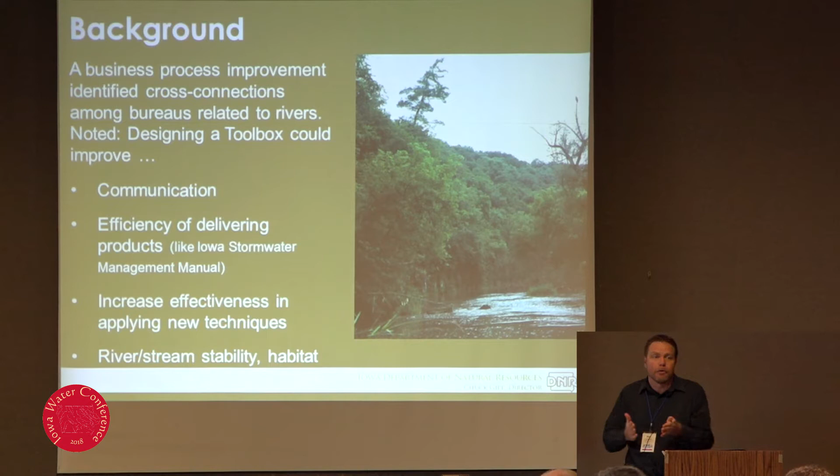And what does conservative even mean when you're working in a stream? And then finally, I think all of our final outcome goal would be that there's more river stability, which surprisingly equates with better habitat in almost all cases. Because there used to be this thing some smart aleck put up on our refrigerator at our break room at DNR, and it said, 'Fish need water, feds say.' It was a newspaper clipping. As it turns out, as these channels are getting blown out and wide because of excessive energy and such, well, just having the depth for fish in a narrower, tighter channel can be a major improvement in habitat.

So what did we do? We started this thing called the River Restoration Toolbox effort, and it was and still is a collaboration. DNR has the environmental services side, and I'm more on the conservation recreation side. We co-managed this project with Tim Hall. He was the leader for it on the environmental services side, but I was the lead technical advisor for this project.

We brought in a lot of folks to help us on an advisory committee to review all the practices, the methodology of the assessment method. We really thought that in the stream restoration world, there's some raging debates about my method's better than your method, blah, blah, blah. In Iowa, we decided real quick, we don't have room for that. We don't have time for it. Let's talk about practices that'll work here, and let's talk about the baseline assessment that's really needed here.

Go out and try it and adapt it when it doesn't work. If we have problems with it, we're going to change it in the next year or two. So we developed some consensus on...

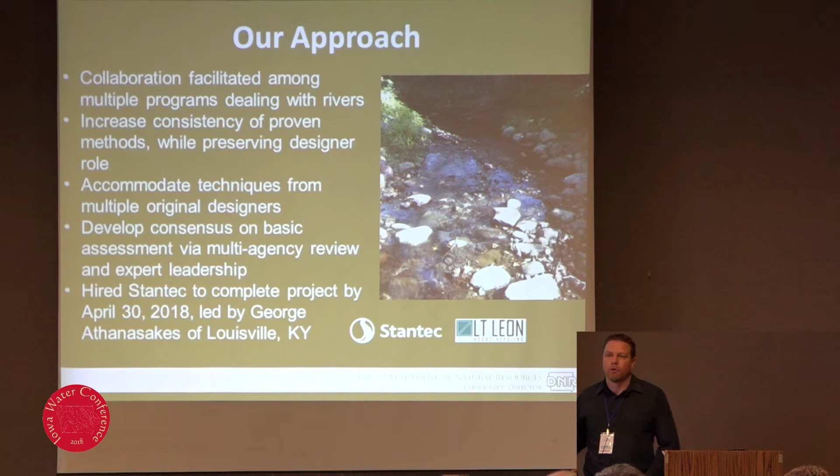That ultimately hired Stantec to lead this project for us and to design a river restoration toolbox, including anything from the data you should really be collecting through design recommendations, and then detailed practices, and I'll show you what all that looks like. George Athanasakes was the lead for this project, and he's got dozens of large-scale river restoration projects under his belt. He leads the restoration group out of the Louisville office for Stantec, and it's been really great to work with.

So our advisors included anything from academia to various staff from different entities around the state, and we wanted to make sure it had some real world eyes on it, and then also some theoretical eyes on it, just making sure that we're broad based enough.

And then we brought in guinea pigs, paying guinea pigs last fall. In collaboration with ISWEP and Iowa Rivers Revival, we tested a first version of this toolbox on a group on the assessment side of it that came into Des Moines and surveyed a creek. Within a day we're entering the data, and then by the next morning had some answers, and that really helped us get some real-world ideas about both how to do the training and what some of the deficiencies were that needed to be addressed.

So this whole thing is really looking at what natural rivers would do left to their own devices, and how can you either tweak your river into getting closer to that scenario, or start over again wholesale because it's that far gone. And how do you make the decision about whether it is that far gone or not?

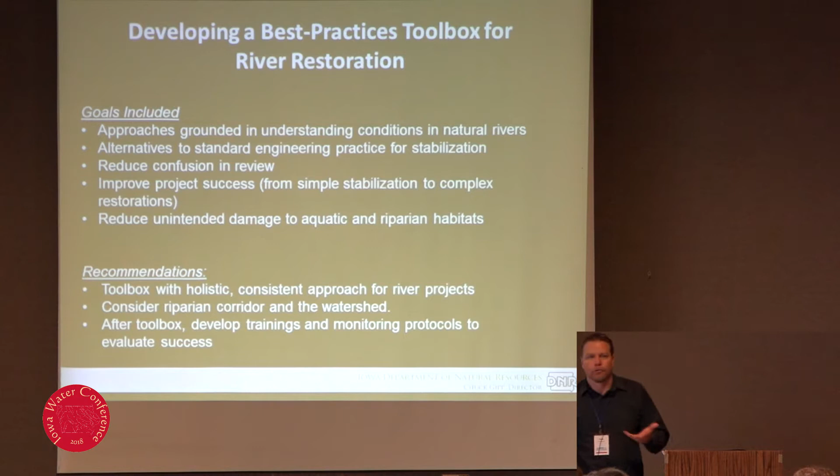The recommendations are holistic, but they don't really tie somebody into one practice or another. They're more like ranked and recommended, so there's still design going on underneath this thing that needs to be smart. So we want projects not to look like these.

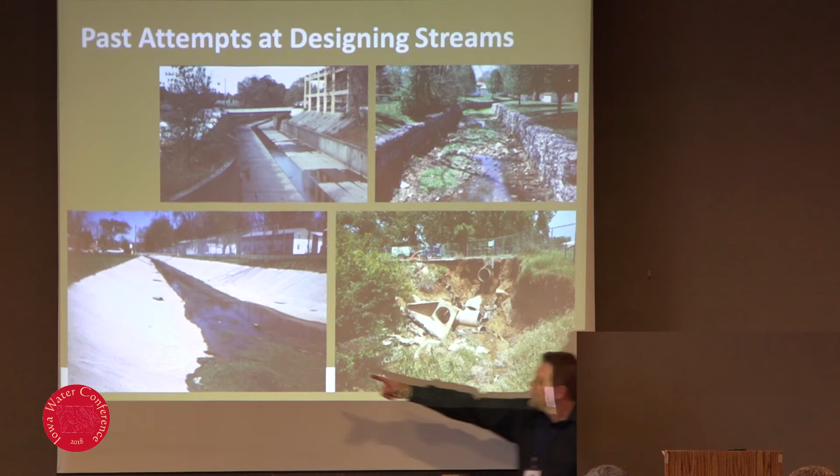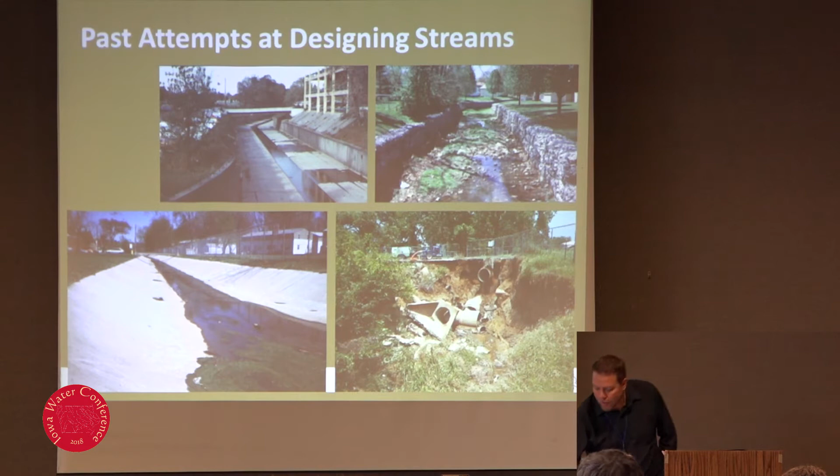Hey, it's really stable, right? It's stable. But what's it doing? You've taken away all the functions, right? And the more functions you take away from a stream system, the less it's got in terms of biology, in terms of nutrient fixing, and it's just trucking stuff through. That's also heating water up, obviously, and creating a lot of externalities to solve one problem.

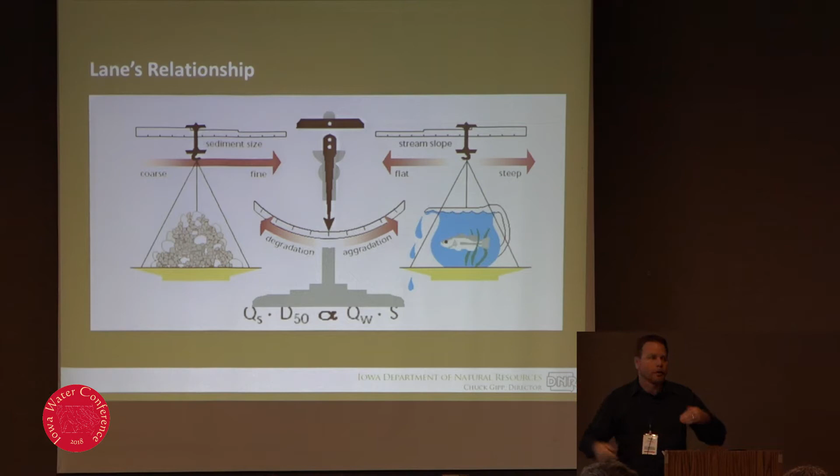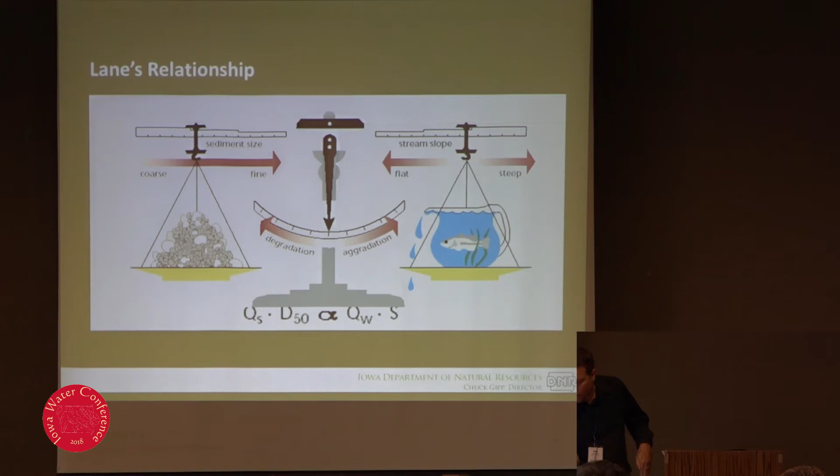But how do you get back there once you're off balance, once your scale is tilted one way or another? If your bed is degrading, should you build it back up, or should you say, let's make this new bed elevation into our regular elevation and then make a bunch of floodplains?

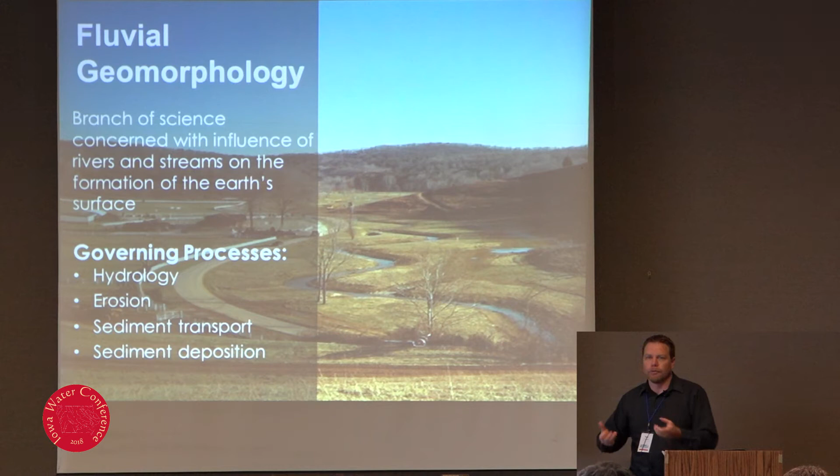So adding to the engineering is this concept of fluvial geomorphology. You've probably heard of it, I hope, maybe, because I've spent a lot of my life in it lately. It's basically looking at the influence of rivers and streams and their formation on the surface of the earth, and why do they form in the ways that they do, given the soil types, the rainfalls, the land use — all those factors result in this expression, this thing that's called a stream.

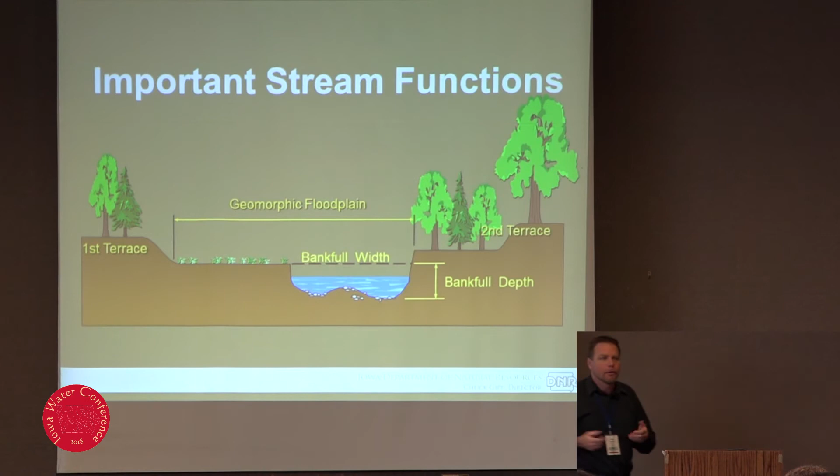In terms of important stream functions, you either have or should have eventually a defined bankfull channel in order to have a stable stream system, and it should have some level of floodplain. Sometimes it doesn't actually need as much floodplain as we might think in order to be stable. There are certain channel types that can accommodate less floodplain and have major implications for what can still be a healthy stream in, say, an urban setting.

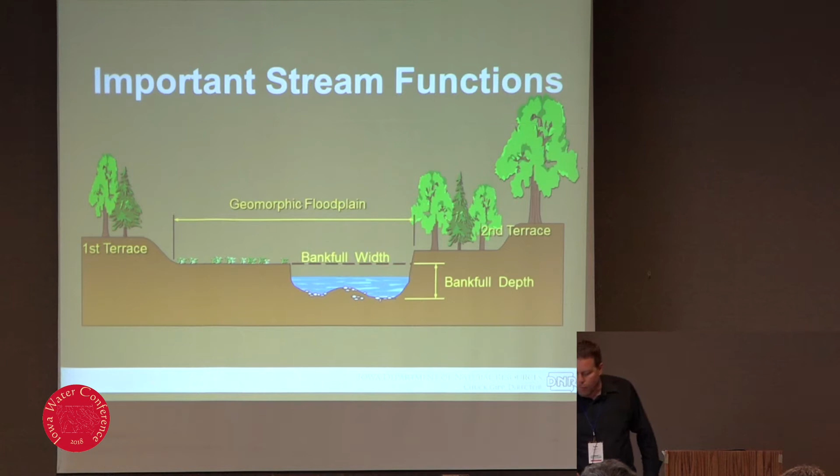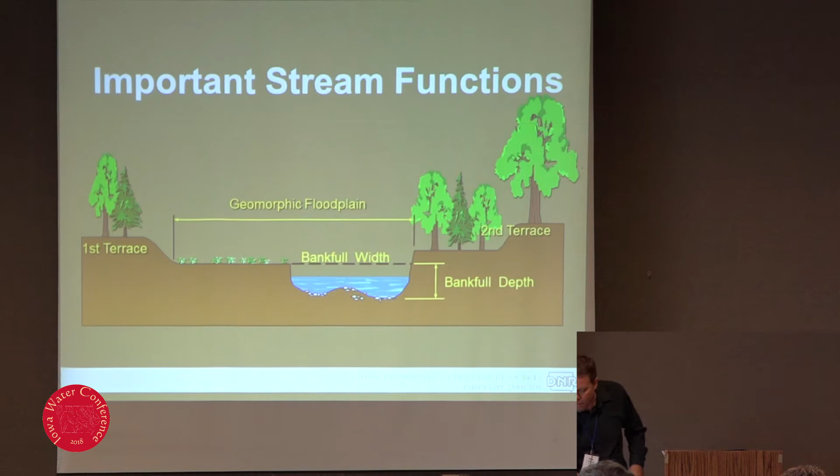We look a lot at these low elevation floodplains because that has a lot of implications on stability, and looking at bankfull discharge as a normalizing function. Why? Because it controls what the channel form can possibly be. It controls, in other words, what your cross-sectional area should be, how deep it should be, and how wide it should be, right?

It helps you understand the hydrology underlying it, in terms of whether you're in a more wetland system with a slightly higher recurrence interval — but always below 2 years is where you'd expect to see it — or whether you're in a really effectively drained system, like a drainage ditch or some urban settings, where you might be closer to 1.2 or even 1.1 in a drainage ditch. Why? Because that's its job — it's supposed to get water out.

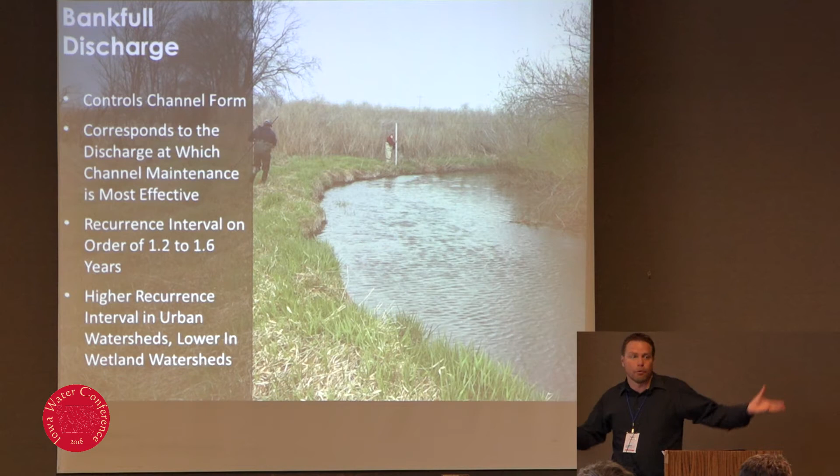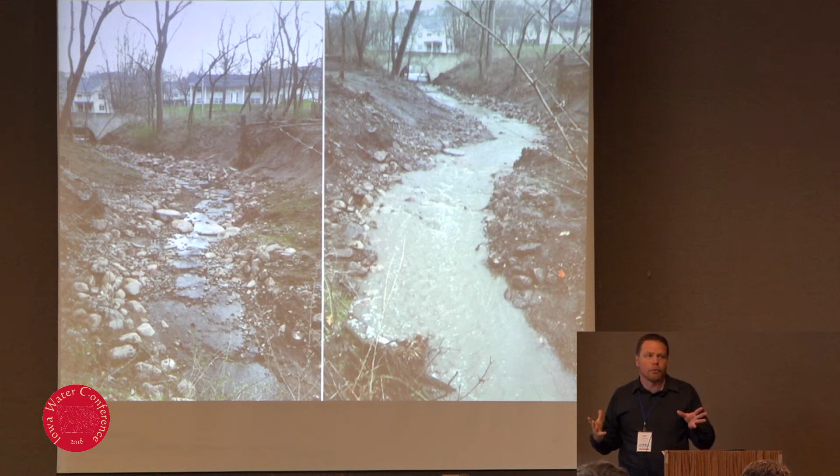So I want you to understand there is a right way to do this that can result in stable answers. In a system like this, which has grown in a little bit, we look more for that vertical sinuosity. It's a step pool, so you maintain your depth by scour in these small drops, and you space your drops according to your channel width. There are ways to look at it that really help a designer come up with answers that function like nature would, even though you just built it.

So then, a lot of these channels, as I mentioned, are evolving because of some change, some kind of insult to the system, or maybe many of them. And this is Iowa, where we work, right?

This is just one model — there's a lot of other ones, but basically, yeah, that's showing up. Okay. So you have this pre-modification, and then you have a change. This says channelized, but it doesn't have to be channelized — it can be a watershed change, whatever.

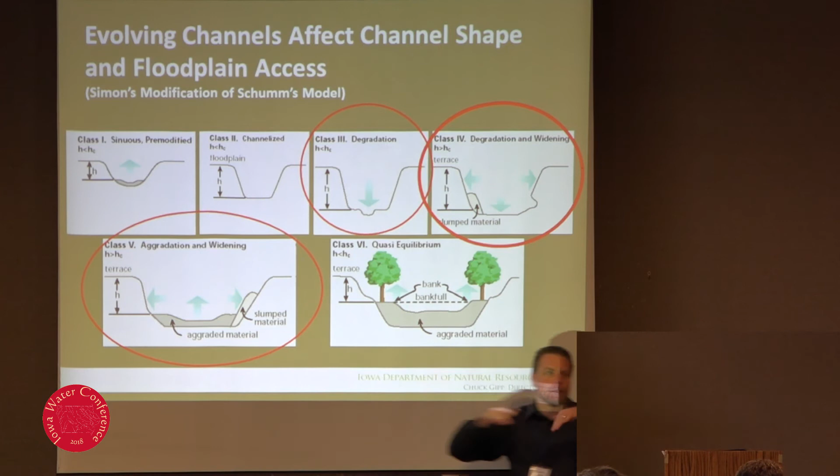A common response is for the bed to start degrading, although it can also start going straight into widening, or off the hook lateral migration and all that. But the point is that you have this change going on, and then eventually it's going to widen, and then start aggrading and catching some depositional material, building a new floodplain until it tightens the channel back up, and eventually you achieve this quasi-equilibrium stage — stage 6.

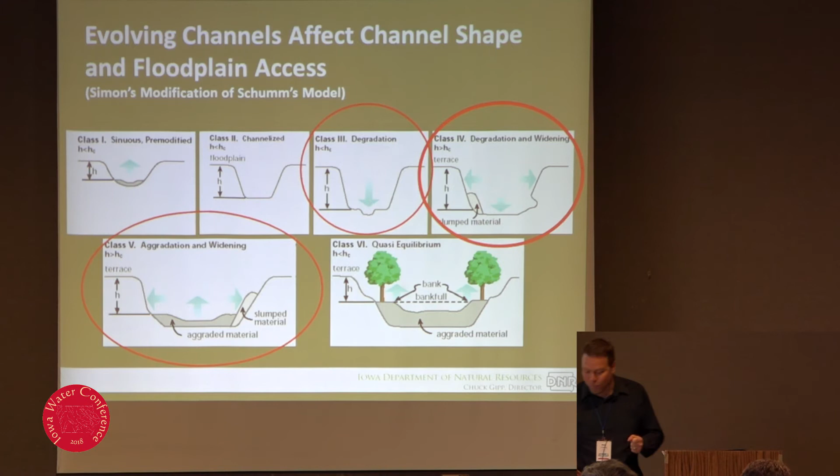So the ones circled in red are the ones where somebody's coming to us saying we got a problem, like our banks are falling in. But why? What are the key drivers of that? This starts to help you explain that maybe it's bed degradation. And if you just stabilize stream banks on a gully, you're not going to have a long-term successful project, I can promise you, because it needs to go through all the rest of this change. It's just going to keep trying to do that.

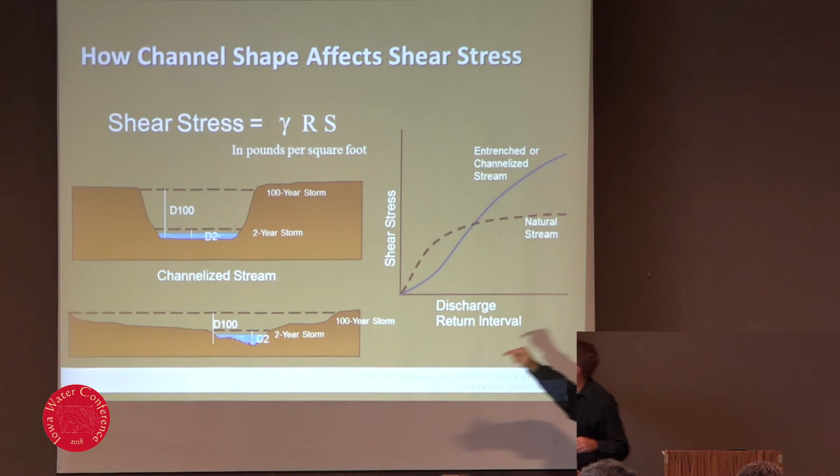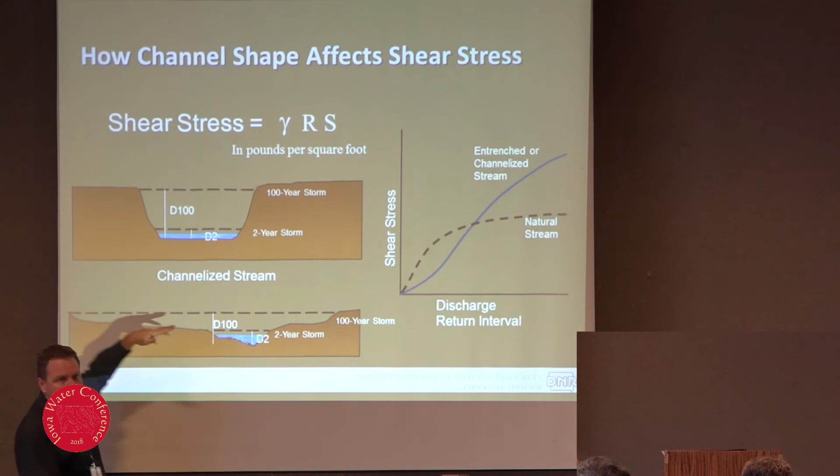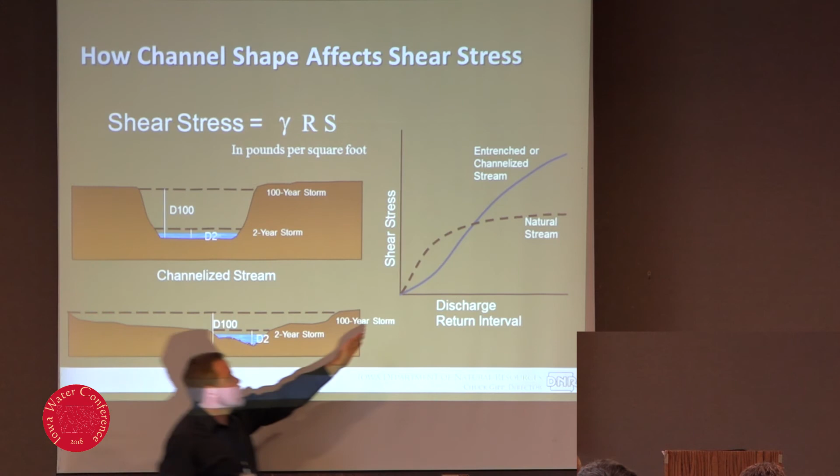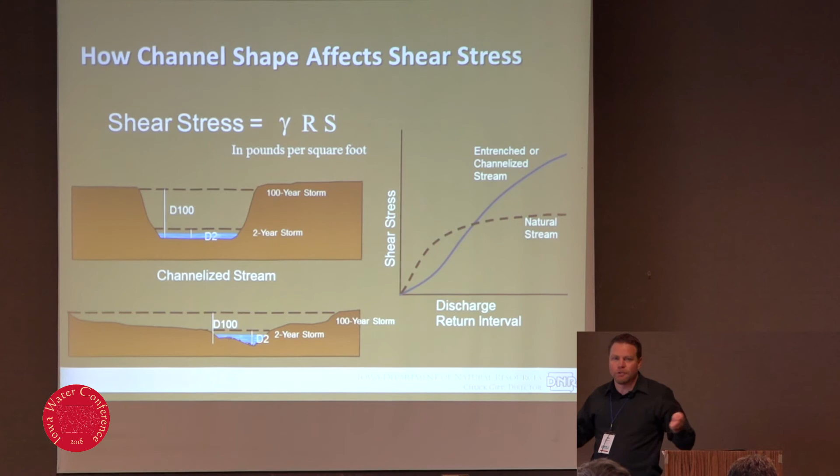This is another really important underlying factor of the toolbox: natural streams, based on shear stress. If you have a stream with a tightly defined channel, as discharge is coming up, notice on this curve that your shear stress is ratcheting up really fast. But then you get to this point where it hits the floodplain, and you see this intersection. All of a sudden your shear stress goes way down. Why? Because it's in a floodplain that's usually vegetated and accessed infrequently, so the vegetation can survive. Plus it's all shallow water out there instead of deep water, which has a lot more effect on the materials in the bed. So having a bed and a floodplain is really important, and having a bed that's not oversized. This is a nice wide channel, but in this case, more like an entrenched or channelized stream, all that shear stress has to be contained inside walls, inside a channel. So it just keeps going up logarithmically, as opposed to how a floodplain system works. That's why a stream can stay in balance better if you give it just a little bit of room, and we're not talking crazy amounts.

So looking at stability and equilibrium can yield better habitat and better nutrient processing. If we're talking about wetlands that a tile drain drops off into, what are we actually talking about? The only way for that to function long-term stable is a floodplain. It's a low floodplain where some of the nutrient processing could happen.

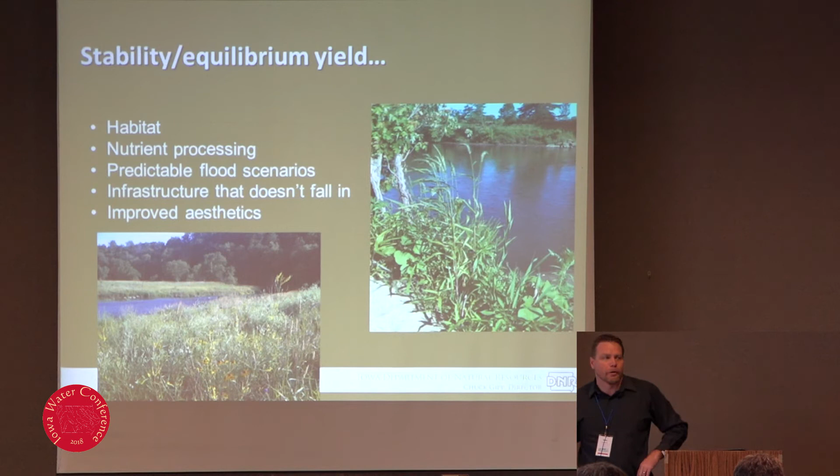There's just this whole idea of infrastructure that doesn't fall in anymore. That's a good idea, and it looks better. It looks like a stream, like something people want to use and interact with. So as far as the practices go, there's a defined set of practices within the toolbox under major headings, and then there are techniques underneath each of those major headings. So there's grade control, there's vegetative restoration. I'm not going to just read you the list because we'll go through these.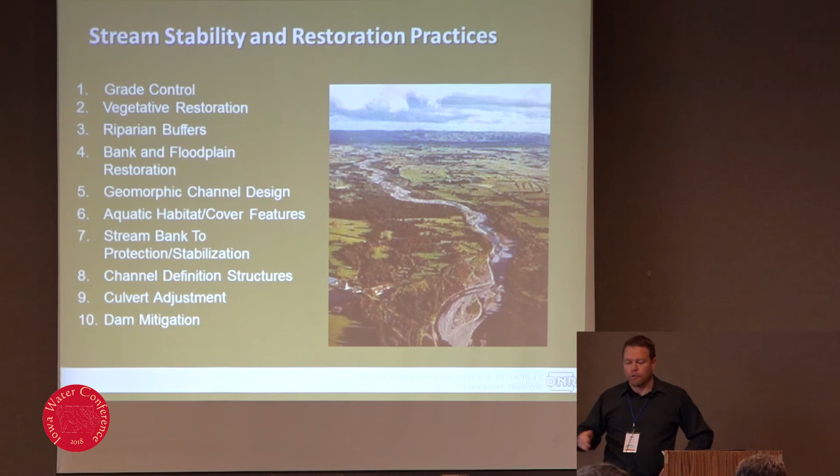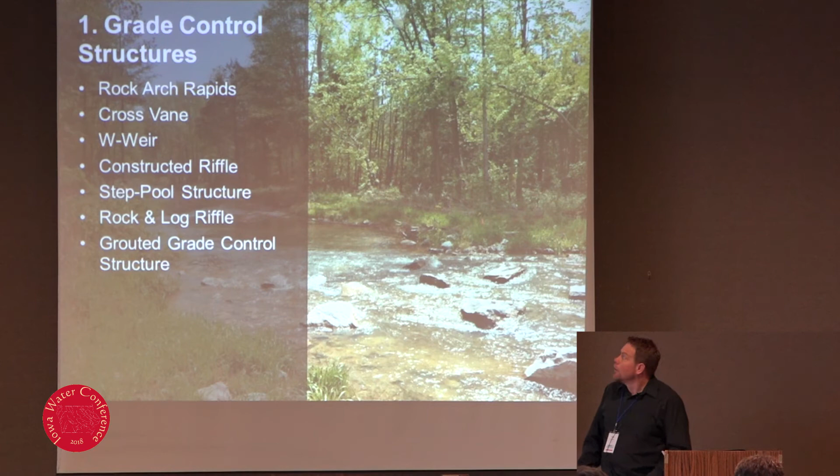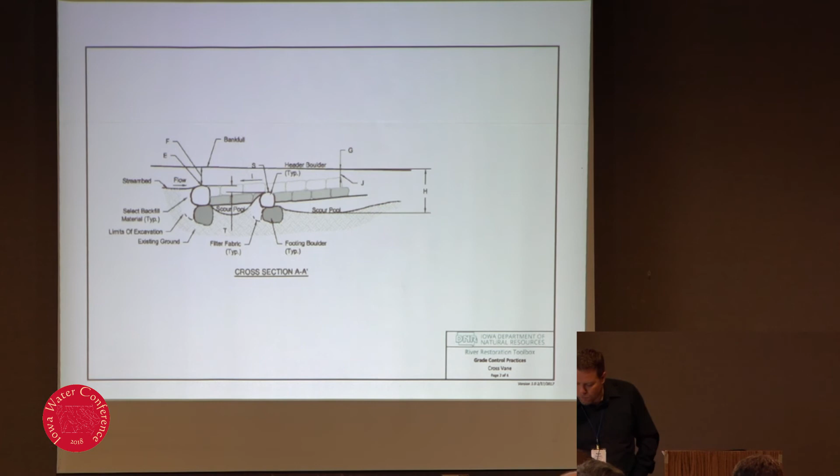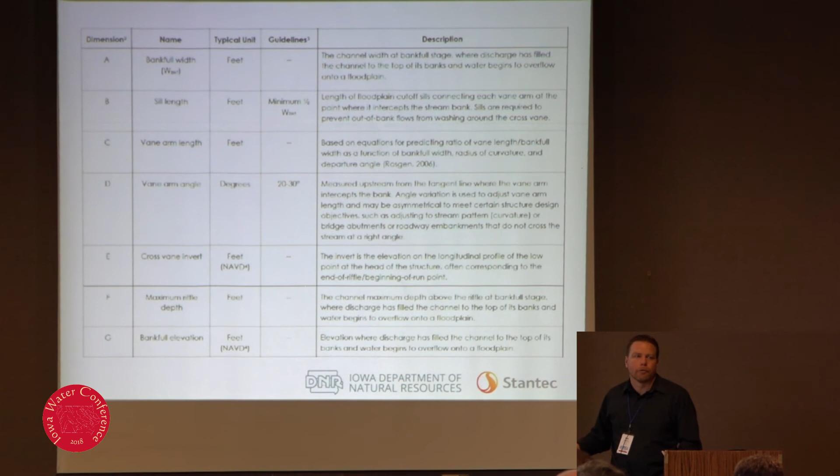These are the recommended grade control structure practices available within here. For example, this is a cross vane. I've seen a lot of things that people call a cross vane, but we also looked for ways to standardize these and figure out which situations they should be used in and not. They can be great structures for fish habitat, but if you try to put them in an entrenched stream, they will fail. You need to know that up front. They're very dimensioned out, so each one of these - dimensions, angles, whatever - is shown in various views. You have your profile view here, here's your cross section, and then it's tabled out as to what ranges you should be working within for each of these structures.

To our knowledge, nobody's ever really done this before in the stream restoration world - really looking in a detailed way at various practitioners' techniques that they've come up with, bunching them together, and then saying, don't use this, use with caution within this range, and so on.

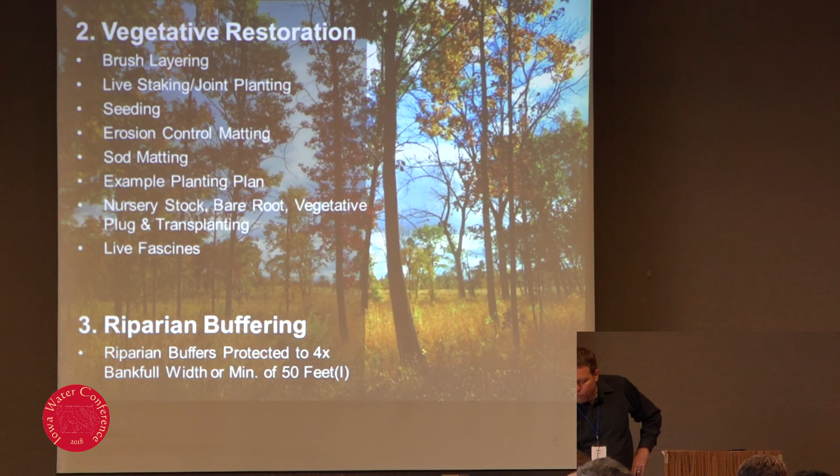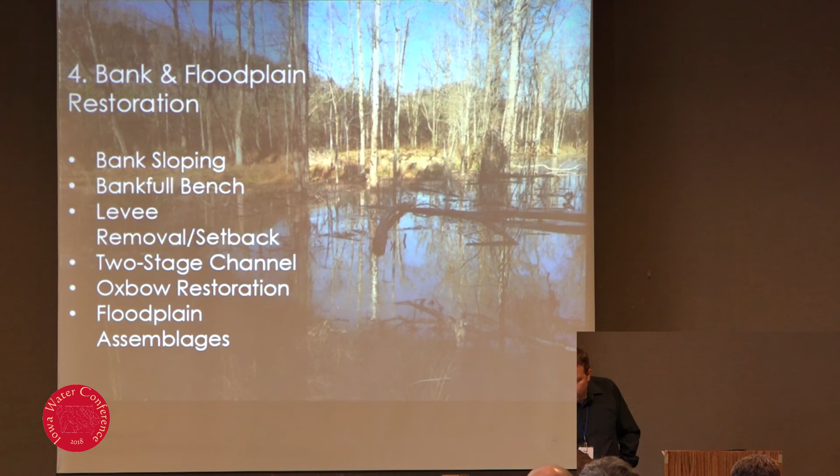It's a structure with a lot of backbone to it. And then there's chapters on vegetative restoration, riparian buffering, and just kind of how to successfully do that. Bank and floodplain restoration are big ones.

So when I was talking about saturated buffers before, for example, well, we had an eroding stream bank here. This is on the Boone River. We used longitudinal peaked stone toe protection with some bendway weirs, but created a ton of floodplain, low floodplain out there that we then put willows down in, and that's catching sediment, and it's taking the pressure off this bank.

We actually excavated this one back, and over wide rivers, you might actually be pushing them out into the channel to get a better sediment transport.

But you know, if you were to do this where there's a field tile outlet, wouldn't that be a great place to create a little rock basin and have your water outlet onto it?

There's a geomorphic channel design chapter, and this one's a lot more data intensive. It requires really a lot more assessment up front, a lot of field work. And it's basically where you're whole scale redesigning a whole channel. You want to have enough metrics to make sure that you don't mess it up, and that it unravels on you and creates a mess.

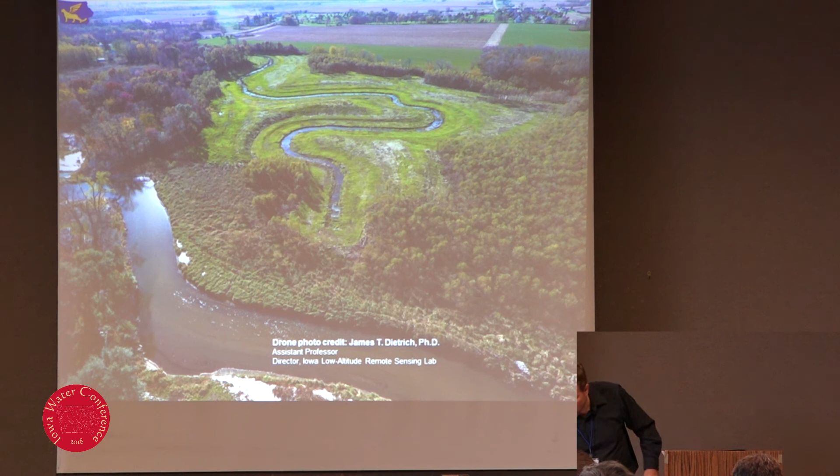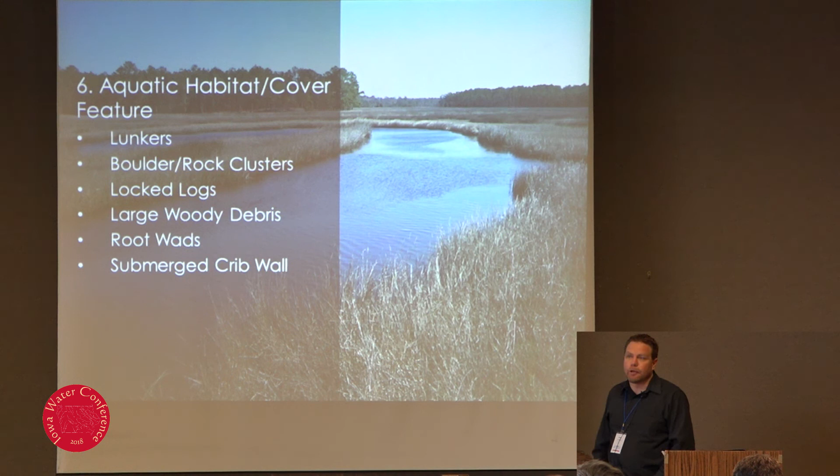So as opposed to building another bridge, it made more sense to spend $500,000 on this project from the county engineer's standpoint, if that makes sense. And then there's a lot of aquatic habitat and cover features, and this is more from a fisheries standpoint, that some of these could be incorporated, and it really just details out how to do them successfully.

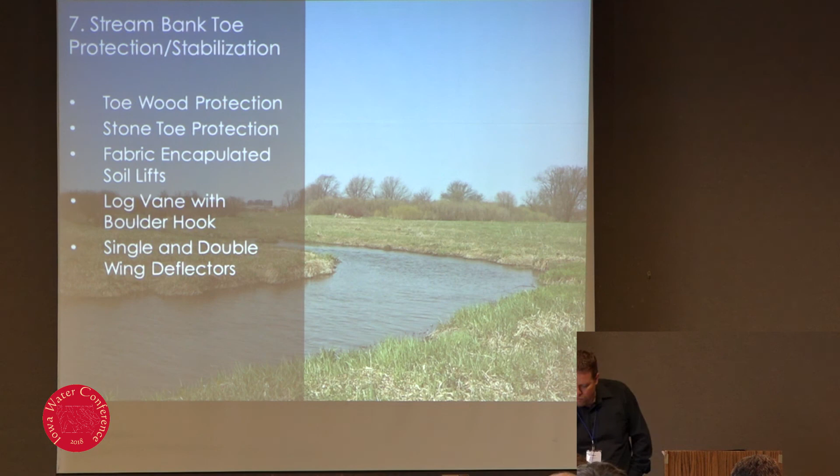Stream bank toe protection is one that we know will be used a lot.

How are we doing on time? What's that? Oh, we're right there. We are right there? Yeah. Okay, I've got to skip over this stuff, but I do want to show you the assessment quick. Time management.

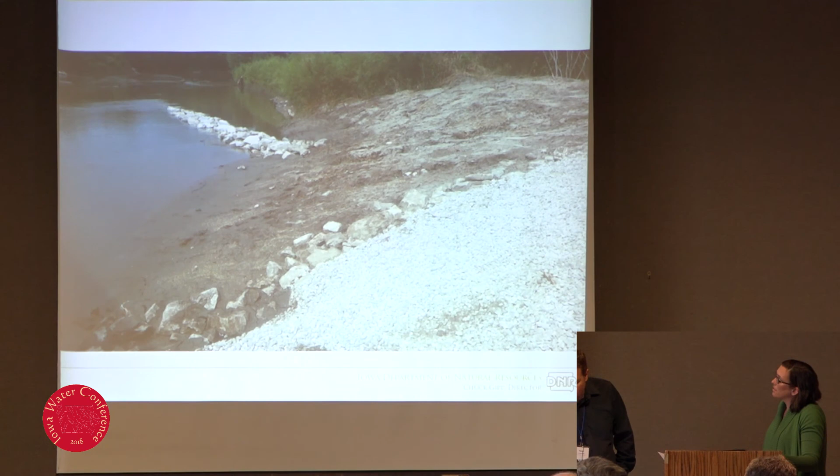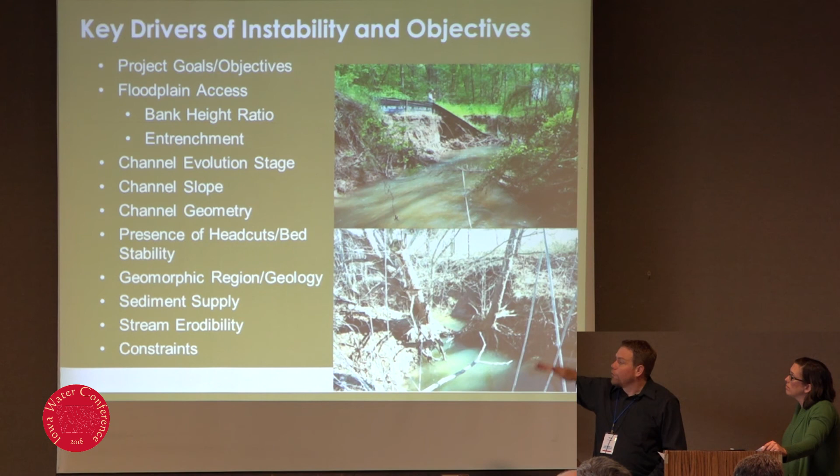So basically you go collect a lot of data. It's a lot, it's a day's worth of data collection probably on a lot of streams of the size we're working on. It looks at these key drivers of instability, and then gives you answers.

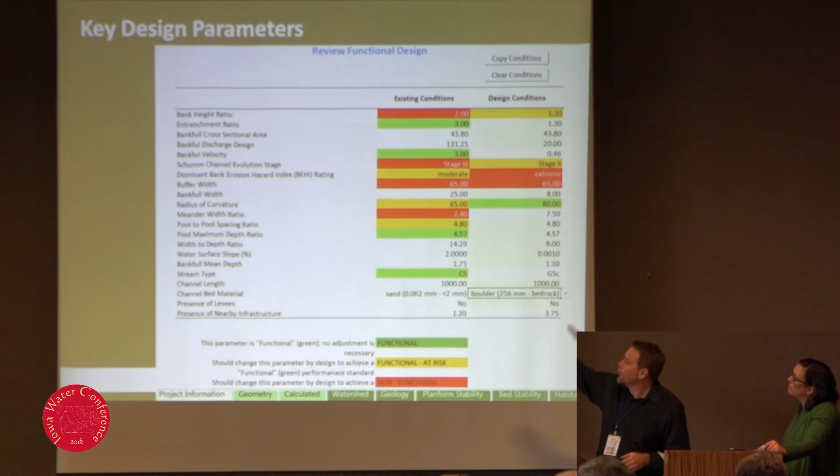You know, like, is your bank height ratio off? Well, in that one, a 2.0 is way too high. You'd really not want to be that high, and so on. It goes down through all these factors and tells you things that need to be addressed. And then you can address them in your design conditions by actually changing cross sections and stuff.

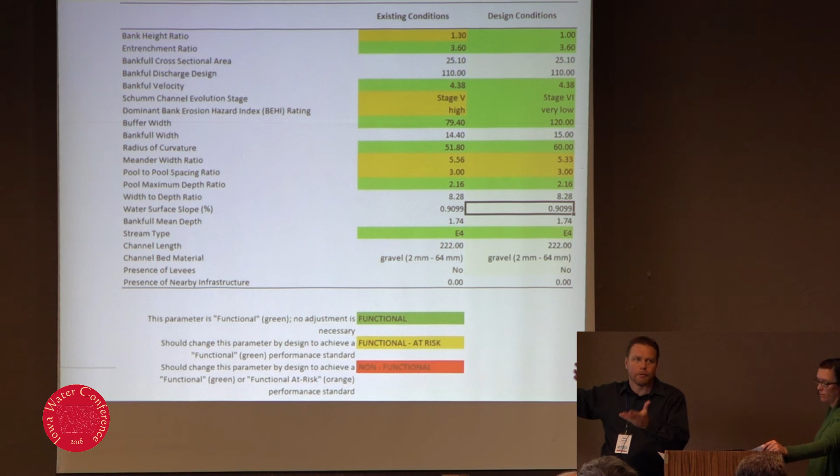And then this is a quick example from the workshop we did last fall. This is a semi-messed up stream, not as messed up as that other one, because we see a lot of yellows, right? So in here, we're in a range where we definitely could say just applying practices that address the yellows is safe.

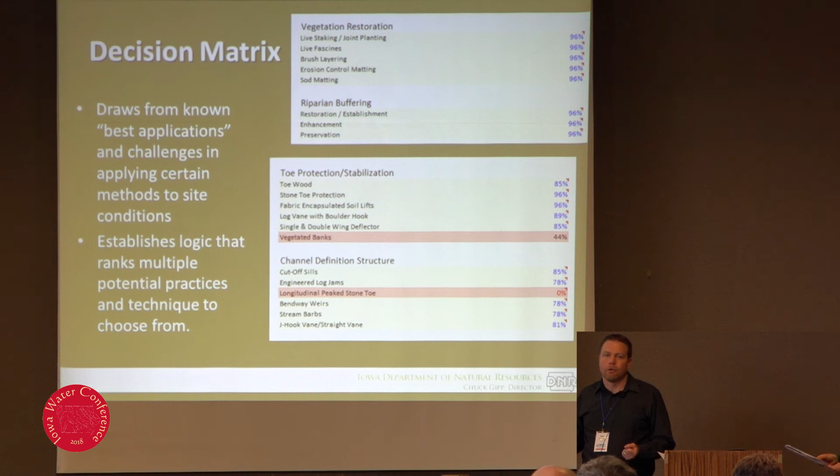We're in kind of a safe zone to do that, and there's a logic system underneath that, but it gives all these answers for rankings of different practices that you may or may not want to use. And the great thing about it is that you can hover over it and it tells you why. It doesn't just make you trust it.

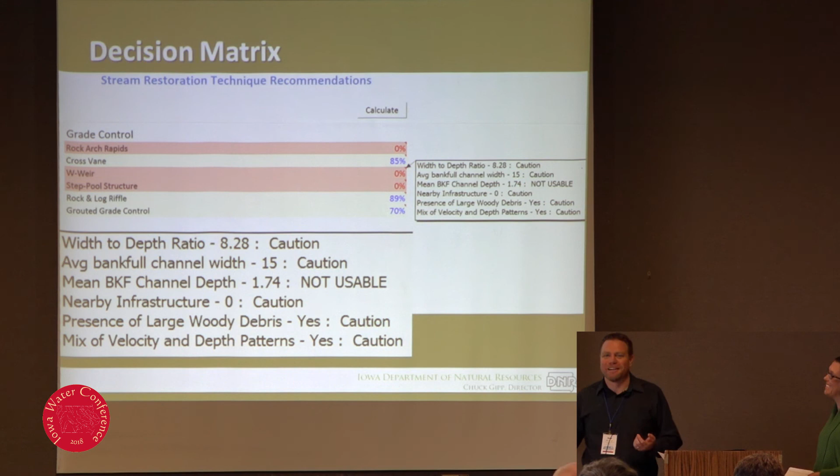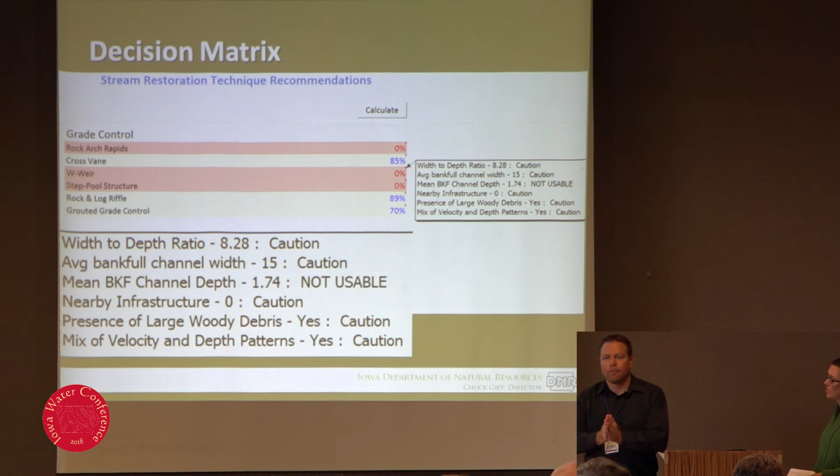And there's going to be cases where we find situations where we're all going to want to argue with it, right? I mean, I've already seen it, but these are the things you should be discussing in a stream restoration project. So there I will stop, and I appreciate your time and attention.

We have time for a couple questions.

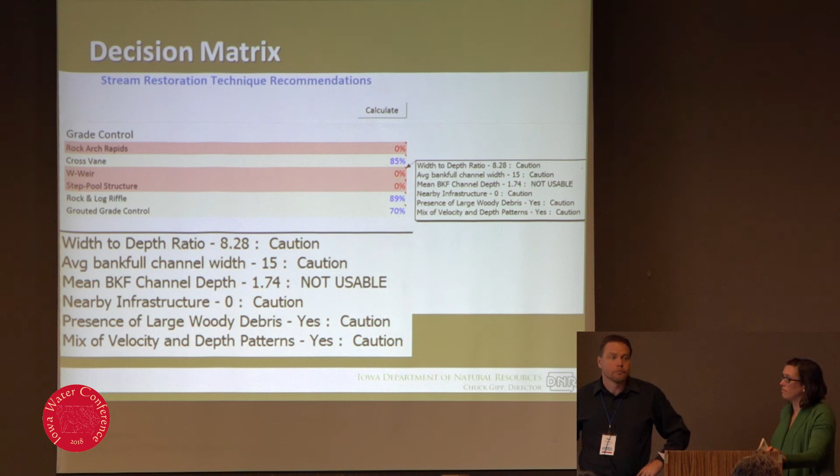So when will it be available? Mid-May. Stantec's on the hook to complete this by April 30. So, an online resource? Yep, it's a spreadsheet-based tool, basically.

What level of training would you need to use it? We're looking at 4-day training for the getting started kind of stuff, and then an additional 4-day for the geomorphic channel design part of it.